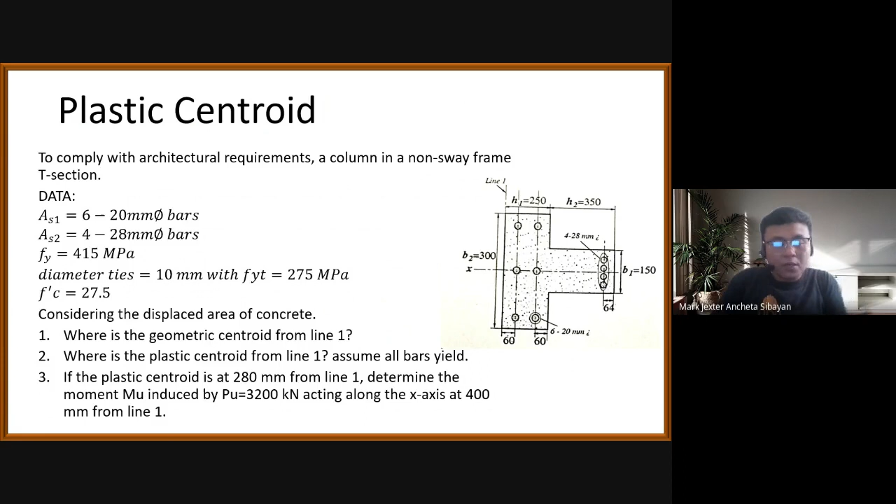Okay, considering the displaced concrete area. So sabi sa problem, i-consider na rin dito ating displaced area of concrete. So discuss naman natin yan sa ating discussion sa ating column.

So sabi dito, okay, where is the geometric centroid from line 1? Pinapana po dito sa ating question number 1 is kung saan po nakalocate yung geometric centroid from line 1. So this is our line 1. Hanapin daw natin dito yung ating geometric centroid.

Okay? Question number 2. Where is the plastic centroid from line 1? So same question lang sa ating number 1, yun nga lang, pinapana po dito is the plastic centroid. Take note of this, magkaiba si geometric at si plastic centroid.

And for our last question, if the plastic centroid is at 280 millimeters from line 1, determine the moment Mu induced by Pu natin na 3,200 kilonewton acting along the x-axis at 400 mm from line 1. Okay, so this will be our question number 3. Pinapana po dito yung ating moment.

Okay? So dito, try nating sagutan si question number 1. So for question number 1, sabi natin, okay, where is the geometric centroid located from line 1? So dito, this is our cross-section.

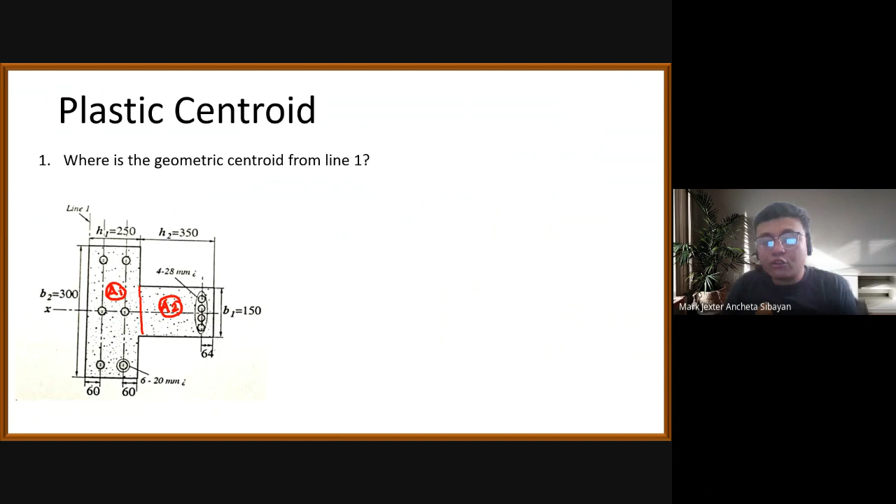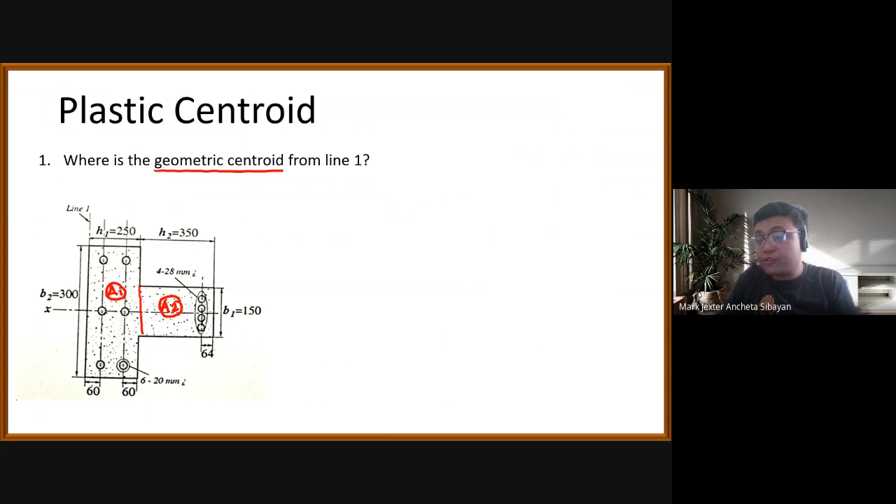So, punta tayo dito sa ating area 1. So, sabi natin, for the geometric centroid, tingnan guys ha, geometric centroid, hanapin natin yan. Para ma-solve natin yan, same lang doon sa gagawin natin sa plastic centroid. But this time, kapag geometric centroid kasi, Varignon's theorem using the moment of our area.

Okay? So, sabi natin, meron tayo dito, okay, from Varignon's theorem, area gross or the gross area multiply by x bar or yung ating x bar, yung location ng ating geometric centroid is equal to the summation of area times yung ating D, from line 1. So dito, hindi natin kailangan isolve yung ating AG times y bar equal to summation of AD.

Because kung titignan natin dito guys, okay, pagpalagay natin guys no, na this is our, yung ating reference for our y bar, kung mapapansin natin dito, naglalay lang naman sila sa isang lugar. So, ibig sabihin, no need na to solve for y bar. So, in this problem, si x bar lang ganapin natin.

Okay? So, dito, area gross is, ibig sabihin nito, yung ating gross cross-sectional area. Yung area ng buong cross-section natin. So, sabi natin, for area 1, meron tayo ditong 300 times 250. So, this is for our area 1. 300 times 250, meron tayo ditong 75,000.

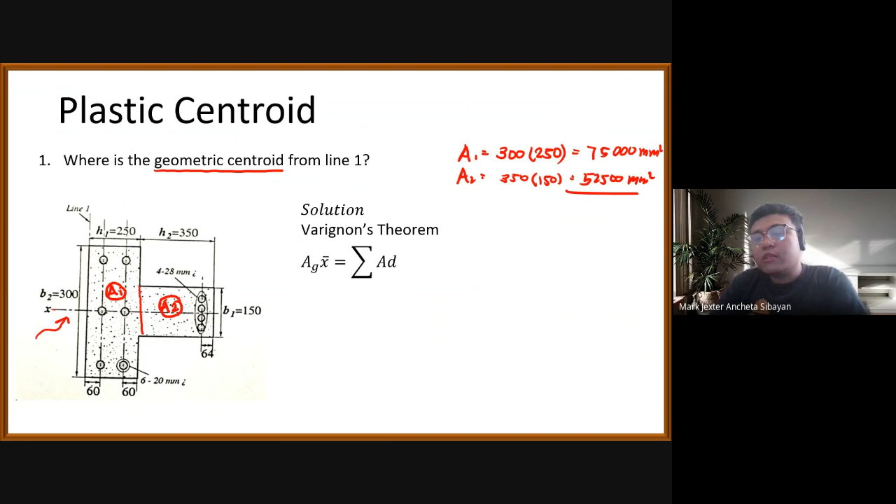Okay, square millimeter. Area 2 is ano? 350 times 150, diba? So, meron tayo ditong 52,500. So, 350 times 150, meron ditong 52,500 square millimeter. So, basically, pag-plus lang natin to, so meron tayo ditong ilan? Meron tayo itong 127,500. Tama ba? So, 127,500 okay, millimeters or square millimeters, this will be our gross area.

Okay? Tapos, i-multiply natin siya sa x bar natin. So, try natin i-solve. So, AG natin, which is equal to 127,500 times X bar is equal to our area 1 na 250 by 300.

Diba? Take note guys, our reference line is ito. So, ipagpalagay natin guys na this is our X sub 1 and this is our X sub 2. Yung location ng centroid ng bawat area papunta sa line 1 natin. Our X sub 1 is just the half of this 250. So, 250 over 2 is equal to 125. This is our X sub 1.

Okay? Times or plus yung ating area 2. Diba? This is our area 2 which is 350 by 150 times yung ating X sub 2. X sub 2 is the location of our area 2 from our line 1. So, meron itong 250 plus half of our 350, we have here 425.

So, dito, using our calculator, let's solve for X bar. Our X bar here will be equal to what? It will be equal to 248.529 millimeters. So, this is our conventional way of solving our X bar or the geometric centroid.

So, let's try naman guys, no, using our calculator. Okay, try lang natin, no, ipakita natin guys kung same lang mapapalabas natin dito na sagot. So, let me open my calculator here. Ayusin ko lang. Open natin si calculator.

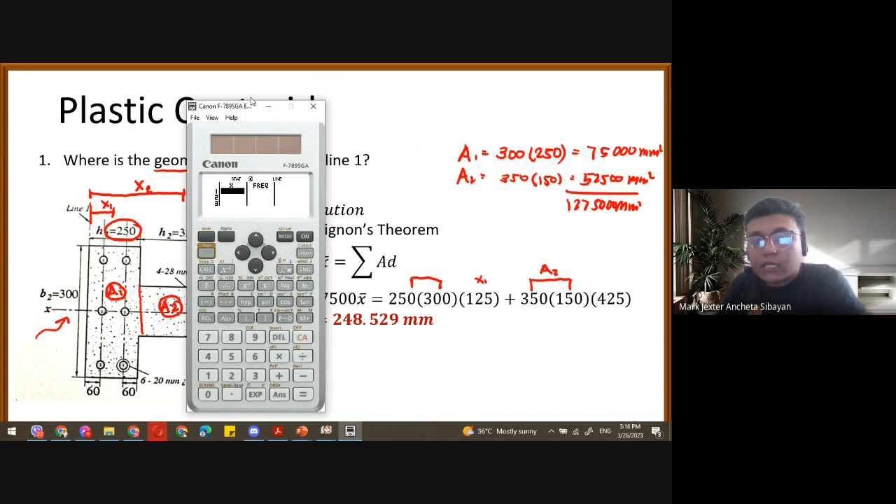Ito guys ha, labelan ko lang, no? Labelan lang natin, this is area 1, this is x sub 1, this is x sub 2. So try natin palabasin si calculator ulit.

X sub 1 natin is 125, tapos sa frequency natin is yung ating area, si 250 times 300, meron itong 75,000, o i-substitute nyo lang to. Punta tayo dito sa number 2 natin, x sub 2 natin is 425 equals, yung area 2 natin is 350 multiplied by 150, meron tayo ditong 52,500 which is same dito, o substitute nyo lang itong 52,500.

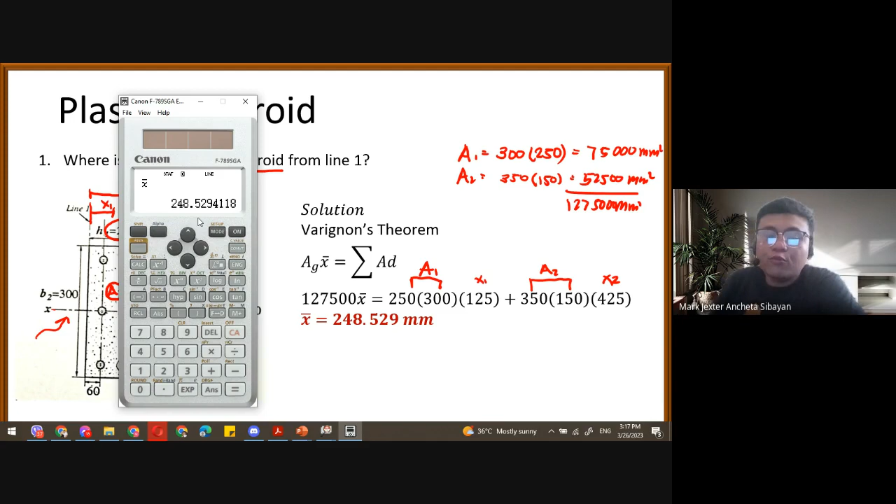Okay, so dito, after nating malagay ito sa ating calculator, pindutin nyo yung ating AC o yung CA. Punta naman tayo dito guys sa ating apps. Sa apps natin, gusto mong hanapin si X bar. To solve for X bar, punta ka dito sa ating variance, sa number 5 variance, meron itong 5, hanapin nyo lang dito X bar. X bar natin is number 2, so number 2 natin ito si 248.5294118 millimeters. Kung papasinin natin, same lang siya dito sa ating answer natin na X bar natin dito.

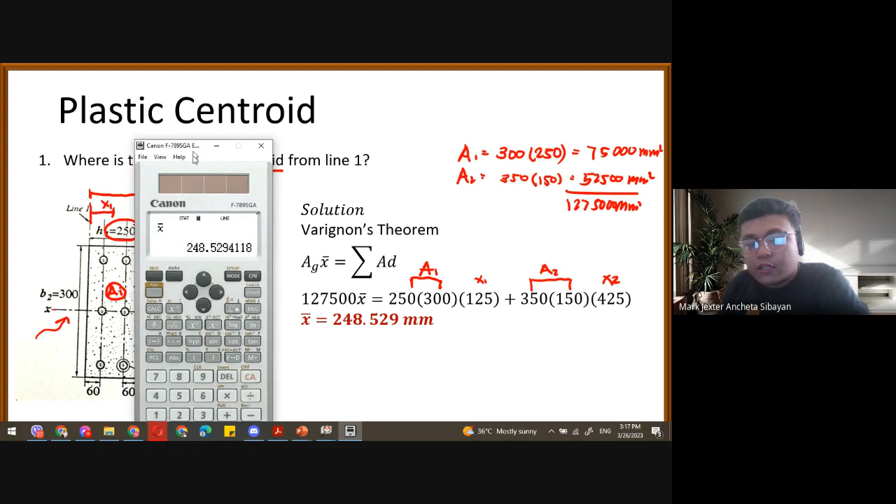So ito yung ating calculator technique in solving for our geometric centroid, using the stat function. So try natin guys, sa ating 991ES na calculator, kapag si 991ES naman yung calculator mo, buksan ko lang.

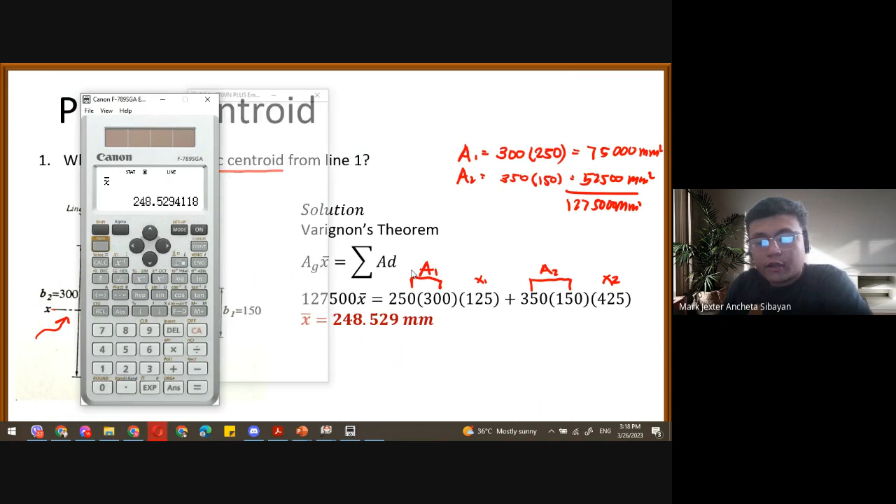Or si 570VN PLUS pala, okay gamitin natin siya. Ganun din, di ba? Punta kayo sa mode, punta kayo sa three, or dito sa stat function, tapos dito sa one variable, so 1, ganun lang din.

So para ma-open mo dito yung ating frequency, pwede mo si shift, si setup. Ibaba tayo, punta tayo sa number 4, on natin dito yung ating frequency. Same process lang, di ba? So meron itong 250 times 300. Yung ating x sub 1 na 125, tapos dito is yung area natin na 250, times 300.

So meron tayo ditong 425, yung x sub 2 natin times yung ating 350 multiplied by 150.

So AC nyo lang din to. Pero dito, wala tayo ditong apps na function, so pwede nyo itong shift, punta kayo dito sa 1 kasi dito yung ating stat function, so ito, punta tayo sa variance.

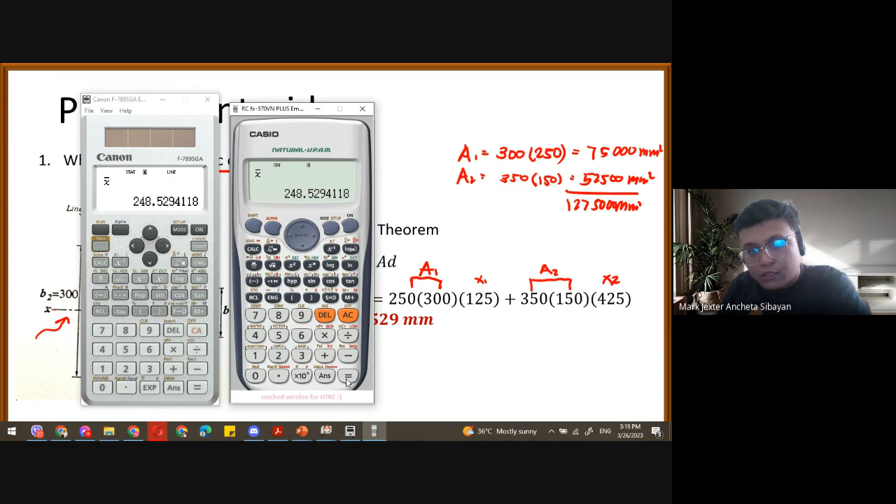Okay, number 4, hanapin nyo si X bar, si number 2. Papalabas nyo din dito si 248.529 mm. So same lang tayo dito sa calculator nito.

Para sa akin na mas okay gamitin sa akin si conventional way because mas mabilis ako mag-solve dito. Pero if ever man na you find this calculator technique useful, or sabihin natin convenient, okay, you may use this calculator technique in your exams, in your board exam or in your final exam sa pre-boards natin. Pwede nyo gamitin to, okay ba?

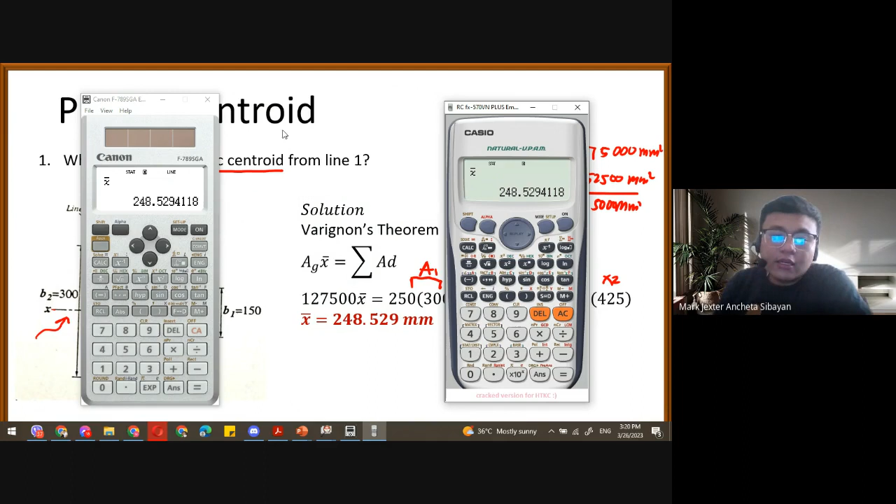Okay, so this is for our geometric centroid. Balik naman tayo guys sa ating question number 2. Ipakita ko lang yung question number 2 is...

Okay, pinapana po dito yung plastic centroid natin from our line 1. Same question lang, but this time is plastic centroid.

So for the plastic centroid guys, simple lang naman, i-moment lang natin yung mga forces natin papunta sa line 1. Ano ba yung mga forces na meron tayo dito? Basically, our forces here is si force A, force B, and force C.

Si force A natin is yung forces natin dito sa ating 1, 2, 3, 4, 5, 6 na bakal. Yung force B naman natin is dito sa ating 4 na bakal, 1, 2, 3, 4, this is our force B. At force C naman natin is yung ating concrete natin.

In other references, this is CS1, this is CS2, and this is CC. Pero dito, huwag natin pahirapan pa sarili natin, mag-ABC na lang tayo, para at least store na lang sa calculator natin. Try natin isolve yung ating forces natin sa ating steel tsaka sa ating concrete. Yung A at saka B is for steel, yung C natin is for concrete.

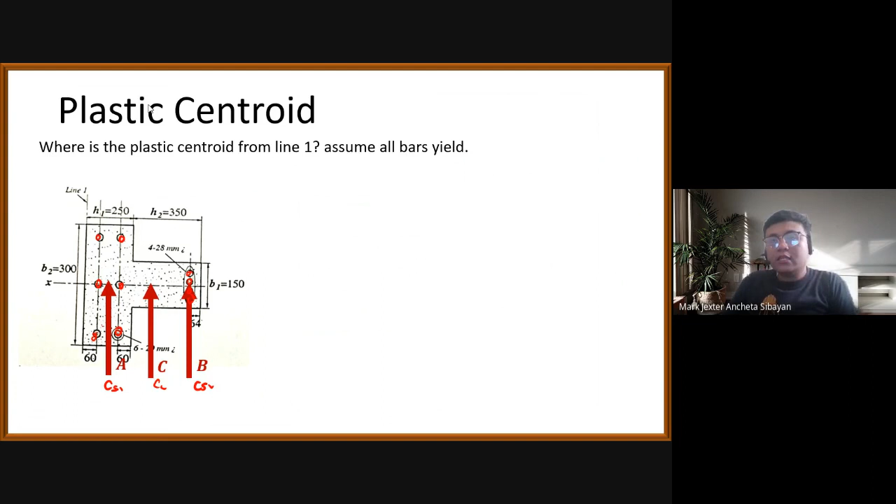Take note of this guys ha. Kung babalikan natin yung ating computation, ating forces sa ating singly reinforced beam, diba sabi natin, yung ating force is AS Fy, tama ba? Ganon din dito, but this time, meron tayo ditong kinoconsider na displaced concrete area.

So in our problem, if balikan natin yung problem natin, nakalagay dun sa problem natin na we will be considering, pakita ko lang, the displaced area of our concrete. If sinabi to sa problem natin, we will deduct this displaced area of concrete doon sa ating AS natin. Okay, pakita lang natin guys ha.

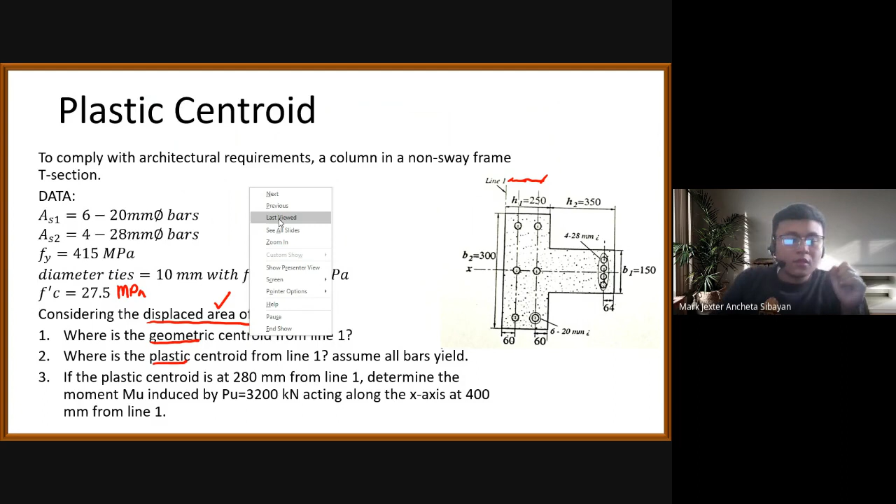Pakita natin. So for our force A, meron tayo ditong AS times Fy minus 0.85 F prime C. Di ba usually ang ginagawa natin is AS Fy. But this time kasi guys, we will be considering the displaced concrete area. So in considering our displaced concrete area, guys, sabi natin is ima-minus natin to. Pero kapag inineglect natin yung ating displaced concrete area, wala tong values na to.

So try natin isolve yung ating question number A, erasing ko lang to. AS natin, guys, sabi natin is meron tayo ditong pi over 4 times 20 squared times 6 na bakal yan, multiplied by Fy natin na 415 minus 0.85 times 27.5. Using our calculator, mapapalabas itong value na to.

So store nyo na lang to sa A natin, please store this at A. Okay, try natin gamitan ng calculator, store ko na lang sa A. Meron tayo ditong, ayusin ko lang, i-clear ko lang muna lahat.

Okay, so meron itong pi over 4 times 20 squared times 6 times 415 minus 0.85 F prime C natin na 27.5. Okay, so basically yan lang din mapapalabas natin, di ba? So store na lang natin to guys sa ating A. Store at A, okay, para at least mamaya is kakalculate lang natin yan.

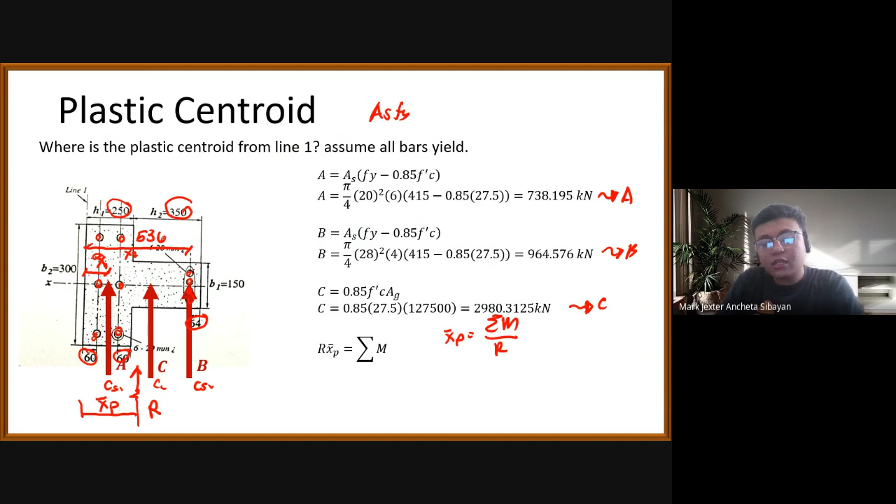And x sub 3 naman natin is itong concrete natin. Basically, x sub 3 is equal to our x bar, di ba? Because same lang naman yung reference point natin sa ating geometric tsaka sa ating plastic centroid. So x bar natin yung ating x sub 3 natin. So meron tayo dito 125 times A, okay, plus 536 times B, plus 248.529 yung ating x bar kanina times C all over A plus B plus C. X bar P natin will be equal to 288.268.

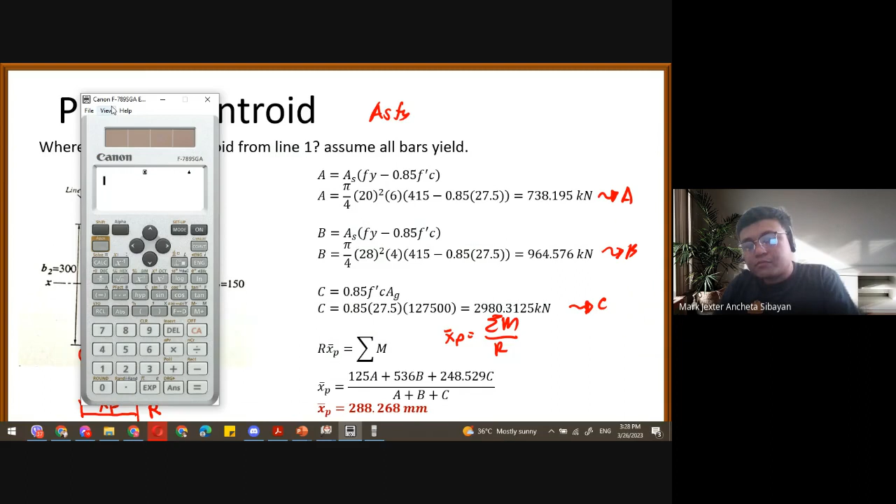Okay, confirm natin guys na kung tama ba yung sagot natin. So dito calculate natin yan. Okay, so meron tayo ditong 125 okay, times alpha A, okay, plus 536 alpha B plus 248.529 alpha C.

Okay, alpha C. Okay, so dito, A plus B plus C. Plus C. So natin dito, mapapalabas nyo dito, sino? Wait lang, ayusin natin siya. Okay, kulang ako dito ng 248 pala to.

So dito guys, meron din tayo ditong calculator technique using the stat function. Basically, yung stat function natin kanina na ginamit, yun lang din gagamitin natin dito. But this time, ang ating ibabarignons dito is yung ating mga forces. Okay, so try natin guys gamitin itong ating mga to using Varignon's theorem. Di ba?

Using yung ating calculator. Okay? So, same process lang. So, mode tayo. Punta tayo sa ating 3. Dito tayo sa ating single variable.

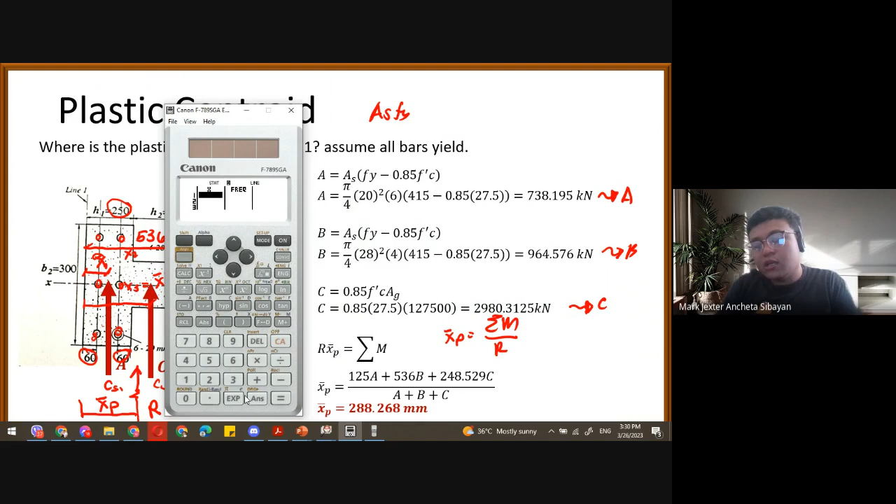So 1. Okay, open natin yung ating frequency. Shift mode, para mapalabas yung setup. Dito, baba, punta tayo sa start. Open natin siya, o on natin yung frequency. Okay, dito sa x is yung mga x distances natin.

X sub 1 natin, guys, is 125. Yung frequency natin dito is yung ating force A, which is si 738.195, di ba, nasolve na naman natin kanina yung A natin? So alpha A ko na lang dito. Okay, so ito po yung ating frequency natin.

Punta tayo sa ating x sub 2. X sub 2 is 536. Tapos yung ating area 2 naman natin, o yung ating force B naman natin, yung letter B, is 964.576, o alpha B, di ba? Next naman is itong 248.529. Okay? And then meron tayo itong force C natin, so alpha C. Yan po yung meron tayo.

Okay, so kompleto na po yung meron tayo. Tama po ba? Okay, so sa ating A, B, and C natin, so AC lang natin to. Punta tayo dito sa apps. Punta tayo dito sa ating variable. Okay, dito sa variance, sa variance natin sa number 5.

Hanapin natin si X bar dito. So X bar is 1. Papalabas nyo dito, hindi ko napindot. Okay, 1, 2 pala, this is 2. So meron tayo ditong 288.268 millimeter. So kung papansin natin dito, same lang mapapalabas natin dito, no?

Using our calculator technique. Okay? So you may use this calculator or this conventional way. Okay, dito guys, no, hindi na ako nahirapan since sinubstitute ko na lang siya sa A, B, at saka sa C. Okay, yung ating mga forces natin. Okay, so back ko lang dito.

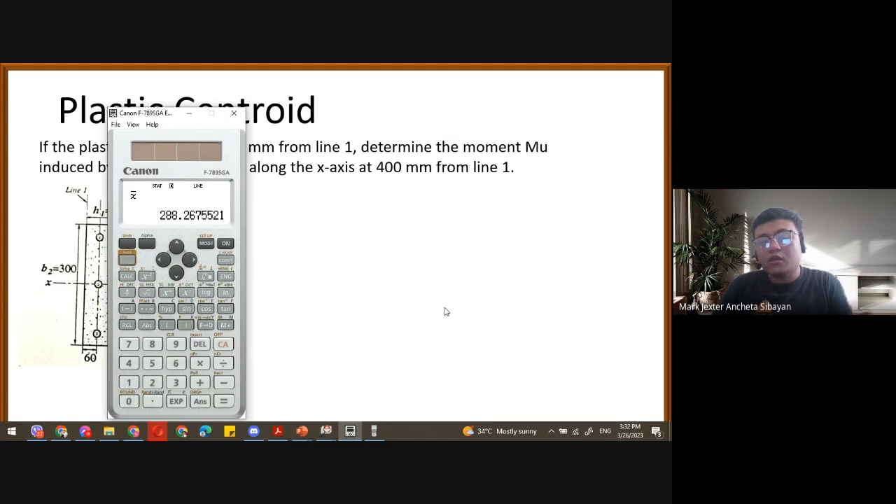So try naman natin guys dito sa ating calculator na isa. Okay, so para sa calculator na isa natin, lagay ko na lang to, no? So 7, 3, 8, okay, mamaya na lang. So mode 3, 1 ulit. Okay, so ganun lang, so x natin is yung x distance, so 1, 2, 5.

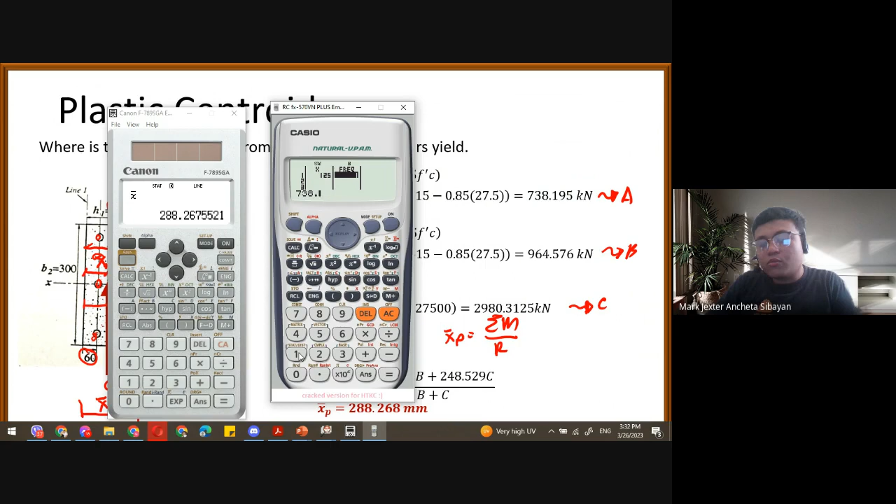So A natin, force A is 7, 3, 8, no? Dito, itatype ko na lang since di ko naman napindot, 195. Okay, x sub 2 is 536. Force B natin dito is 964.576.

Okay, sa ating 3 naman o sa ating force C is yung ating distance niya na 248.529. And then, yung ating force C natin is equal to saan? 2980.3125. Okay, AC natin to.

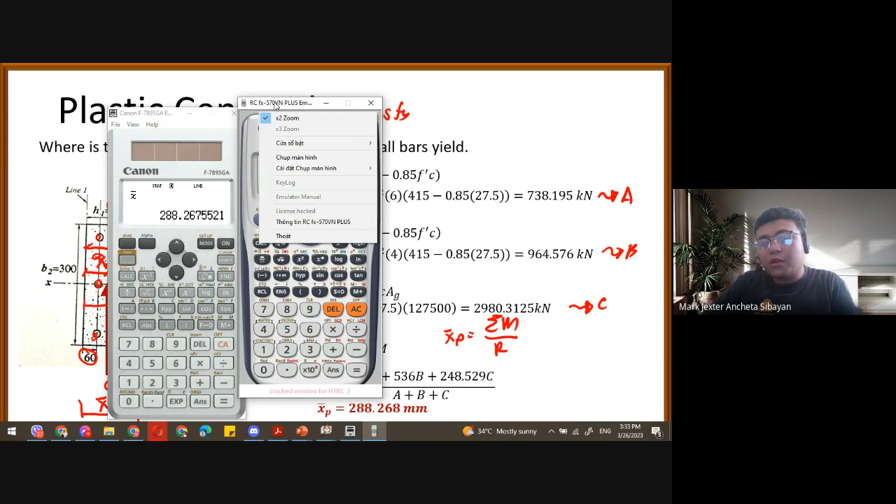So shift, ito, punta tayo sa variance, so number 4. Punta tayo sa ating X bar, so number 2. So equals lang natin to. Mapapalabas nyo si 288. Okay. Medyo maiba dito, 265 o 268 lang din pala. Pares lang din pala yung mapapalabas natin. Okay, so you may use your calculator or you may use the conventional way of solving our problem. Okay?

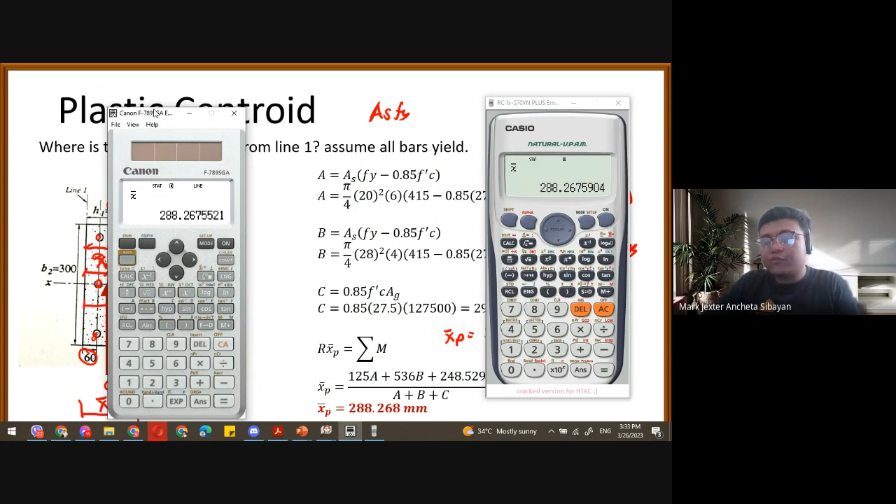So try naman natin guys, no, ito ating last question. So dito, nag-calculator technique tayo. Last question natin, balik tayo dito. Okay, meron tayo ditong: if the plastic centroid is at 280 millimeters from line 1, determine the moment mu by pu 3,200 kN acting along the x-axis at 400 mm from line 1.

So interpret natin to, no? Yung ating plastic centroid daw is located, okay, so pakita ko na lang to. Wait lang, okay, irisin ko na lang to guys, ha, para hindi tayo mahirapan. Tanggalin ko na lang itong mga forces dito.

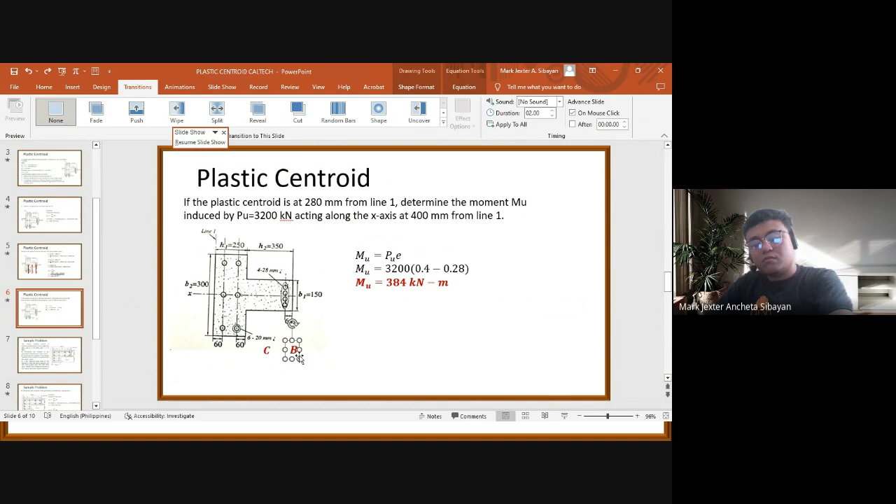Okay, balik tayo dito. Okay, so sabi natin guys, no, ilisin ko lang to. Okay, sa problem natin na to, meron tayo ditong centroid na pinapahan, o given na plastic centroid which is 280 from line 1. So ipagpalagay natin guys na this is our x bar P na 280. This is our x bar P, 280 millimeters from line 1. So x bar P natin yan.

So dito sa problem natin, pinapala po dito yung ating moment na kung saan meron natin itong acting load na 3,200 along the x-axis, along dito, which is 400 millimeters along o from line 1. So 400 natin, ipagpagyan guys, no, ito, yung 400 natin, location na ating force natin. Andito yung force natin na 3,200 kilonewton. Okay, so sa problem na ito guys, so tandaan natin guys, no, meron tayo itong formula kasi ng moment natin.

Moment is equal to force times eccentricity, or mu is equal to pu times eccentricity. And guys, dito sa ano natin, eccentricity, it is measured from our plastic centroid up to the point of our load. Okay, so ito yung ating eccentricity na hinahanap.

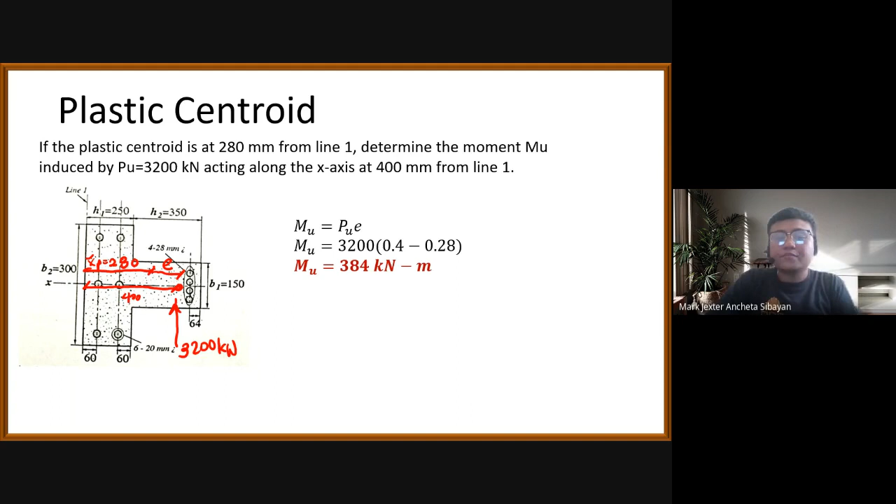Yung mula dito sa ating plastic centroid, hindi po sa ating geometric centroid. So mu natin basically is equal to 3,200 times 0.4 minus 0.28. Okay? So meron tayo ditong ilan? Mu natin dito will be equal to 384 kilonewton meter. Okay? So ito, yung ating unang problem dito sa ating plastic centroid.

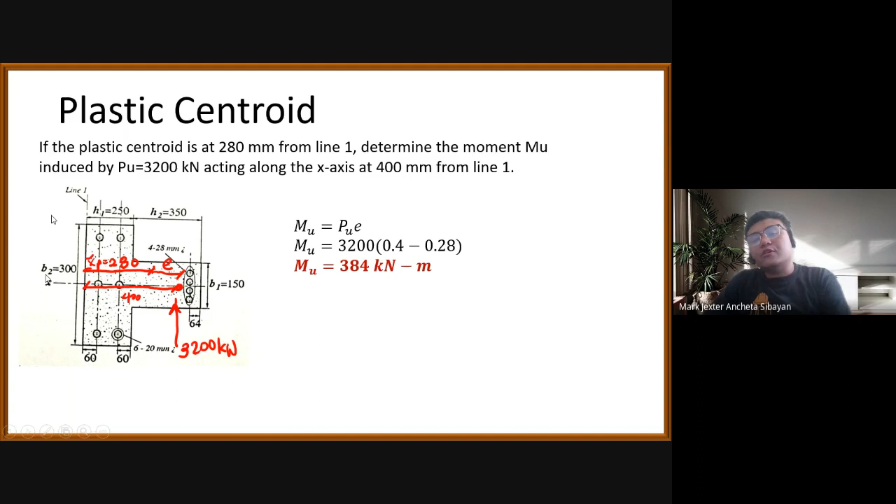Dito sa problem natin, nag-solve tayo guys using the conventional way and then the calculator technique. So in your board exam or in your final examination, you may use this calculator technique or you may use the conventional way, kung ano ba yung mas convenient sa atin. If ever man you want to use both, okay lang para ma-verify nyo kung tama ba yung sagot natin.

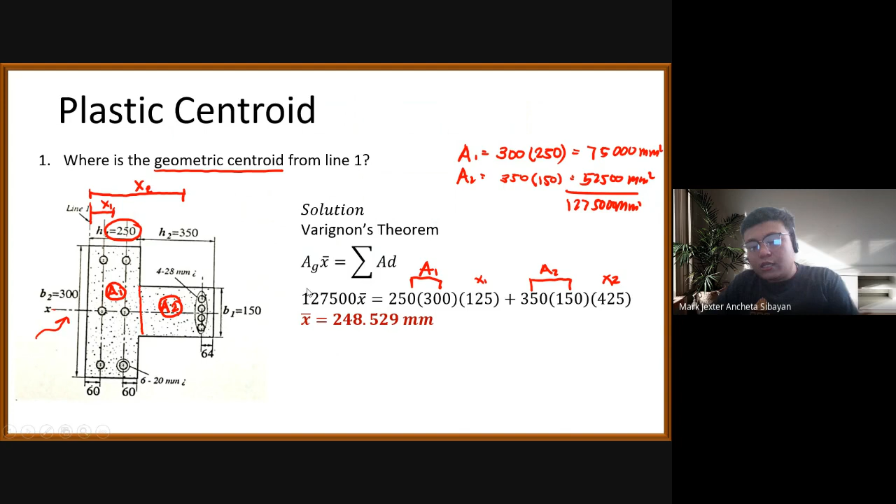Siguro dito, baka sabihin natin na niloloko ko lang kayo since isang problem lang to. So try natin guys magkaroon ng isa pang sample problem, para ma-verify natin if tama nga ba yung ating sinosolve. Dito guys, ipakita ko lang, di ba kanina, para mas makita nyo dito sa problem na to, ang ginamit ko sa calculator natin, o balik ako dito sa ating slide number 2.

Ang ginamit ko dito is yung ating mode 3.1, which is yung ating single variable. Pero pwede nyo gamitin dito yung ating linear. Kapag ginamit itong linear natin, dalawa yan, si x and y. Pwede mo gamitin to, pero ilalagay mo lang sa y since wala ka naman ditong y distance, ilalagay mo ditong 1, 2, 5. Okay, may itong 0 sa ating y.

Frequency natin dito is ito, si A natin. Okay, ganoon lang din. So number 2 natin is 536, diba? Okay, 0 lang din yung y natin. So B tayo, force B. Okay, ganoon din dito. 248.529, tapos 0, tapos ating ano dito is 4C, diba?

Okay, you may use this, actually dito sa calculator technique na to, mas ginagamit ko si mode 3.2, yung ating linear na stat function. Because what if kapag meron na tayo ditong y distances, tama ba? Pero dito sa problem na to, wala tayong y distance dito, kaya 0 yung nilagay ko. Okay, so try natin i-solve to.

So AC natin, check natin, i-verify natin guys. Meron tayo itong apps natin. Punta tayo dito sa ating variance, punta tayo dito sa ating x bar. So x bar is same lang, di ba? Lalabas natin ito si 288.

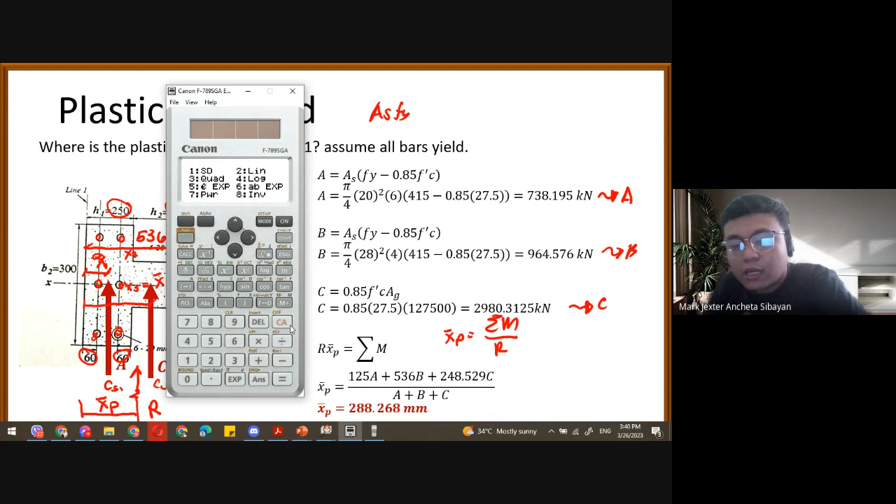If ever man we want to solve for y bar, check natin. Y bar natin is itong 5. Okay, 0 lang din, di ba? Because wala nga tayo ditong y distance, di ba? Pero makapaka-convenient nitong ating y bar at x bar natin, itong ating mode 3.2, itong linear natin, kapag yung ating section ay meron na po tayo ditong y distance, di ba?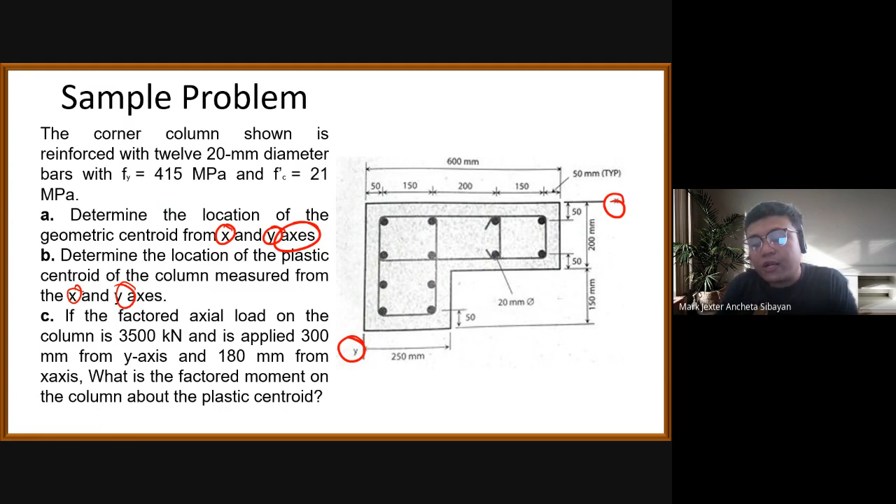Okay, ito yung ating x, ito yung ating y axis. Question number 2, or letter B, is yung ating plastic centroid measured from X and Y axis, same question pero plastic centroid. And for letter C naman, hanapin naman po natin dito yung ating factored moment natin about our plastic centroid. So in this problem, walang sinabi guys na consider the displaced area of concrete. If not said in the problem, gamitin nyo na lang guys yung neglect the displaced concrete area. I-neglect na lang natin guys kapag hindi sinabi sa problem kung i-consider or kung i-neglect.

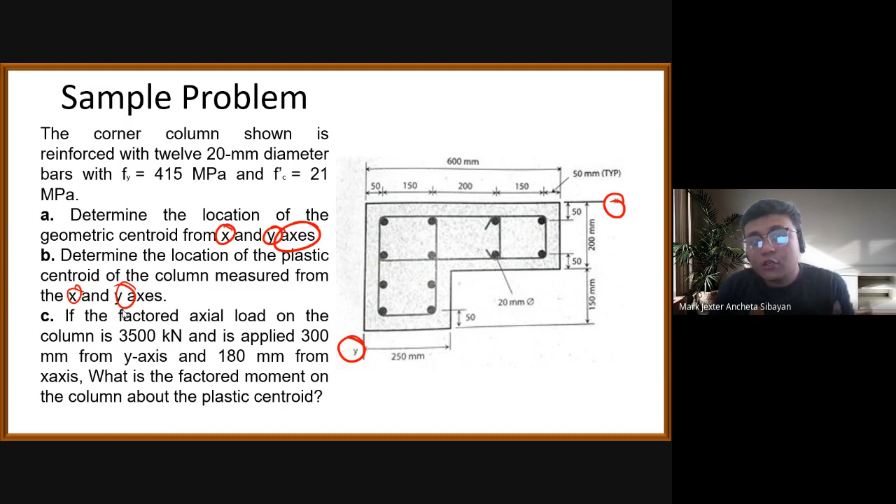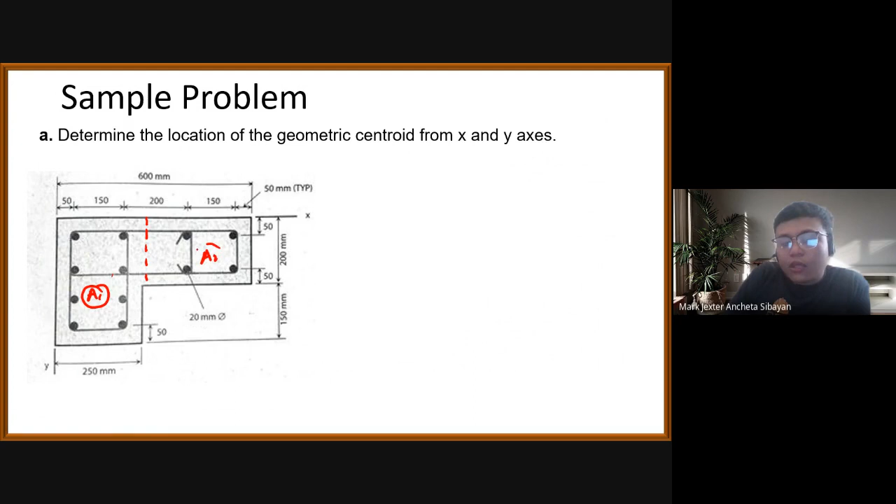So kapag if not given, i-neglect nyo na lang yung ating displaced concrete area. Okay, so try natin guys sagutan itong ating question number 1 o letter A. So for letter A natin, solve natin si geometric centroid. If sinabi natin geometric centroid, solve for the centroid ng area. So hatiin na lang natin to guys. Ito yung area natin, so this is our area 1 and this is our area 2. Di ba? So sabi natin guys, our solution here is for Varignon's theorem, A sub G times x bar is equal to the summation of A times d.

A1 natin dito, isulat ko lang dito na para medyo mabilis. A1 natin dito is 250 multiplied by, ilan ba itong height natin? 200 plus 150 is equal to 350. So using our calculator, 250 times 350 is equal to 87,500 millimeters squared. A sub 2 naman natin is ilan? Okay, meron itong, ilan ba to?

Okay, meron itong 600 minus 250, it is equal to 350, right? So 350 multiplied by 200. So 350 times 200, meron itong 70,000 or 70,000 mm squared. So, ipag-plus natin to, 70,000 plus 87,500, it is equal to

157,500. So, 157,500, ito AG natin. So, AG is equal to 157,500 times X bar equal to 250 times 350. Okay, unahin mo natin sa X bar natin.

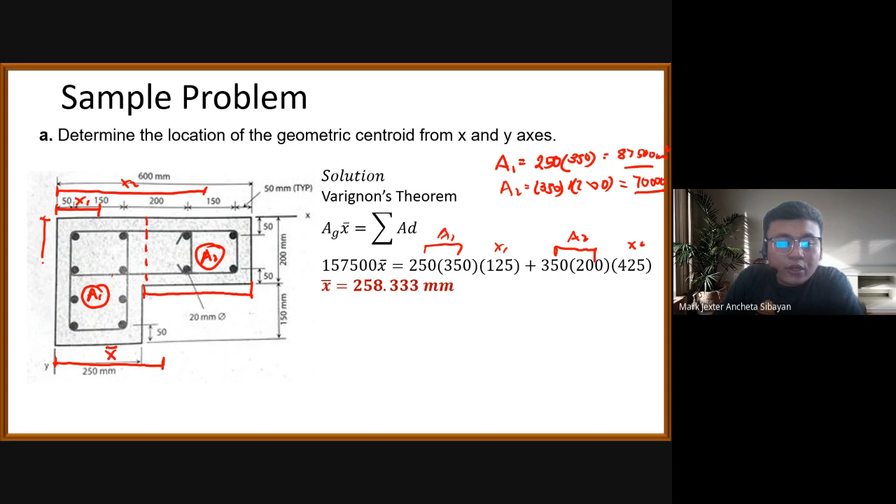Punta naman tayo guys dito sa ating Y bar natin. Same concept lang, di ba? But this time, okay, ito yung Y sub 1 natin. Kasi ito yung ating X axis, di ba? Ito naman yung Y sub 2 natin. Ang pinapanap dito guys is si Y bar.

Okay? So, 157,500 times Y bar is equal to area 1 times Y sub 1, 175, which is half of our 350, times or plus area 2 times half na ating 200, which is 100. Okay? So, yung ating Y bar natin dito using our calculator is equal to 141.667.

Okay? So, what if naman kapag gamitan ito ng calculator technique? So, using the calculator technique, ipakita natin. Okay, in calculator technique, ayusin ko na lang. Okay, iba ko lang to. Calculator technique natin, irisin ko lang to. Okay? So, wait lang, nawala to.

So, mode 3. Kapag gagamitin mo si 1, medyo mahaba because isa para dito sa ating X, isa para sa Y. Kaya kapag ganito, dalawa na yung hinahanap mong variable, okay? Pindutin mo lang si linear kasi dito sa linear, may dalawa kang variable dito. Diba? Yung ating X tsaka yung Y natin. So, 2 tayo. So, X is yung ating X sub 1. y is yung ating y sub 1.

So, 1, 2, 5. Ito yan, no? Yan yan. Tapos, sa y natin, ilagay nyo to, 175. Diba? Okay nga pala, wala pala tayo ditong frequency. So, solve natin buksan natin si frequency. Open ko lang, nakalimutan ko, sorry. Okay, so ulitin ko. 125. This is 175.

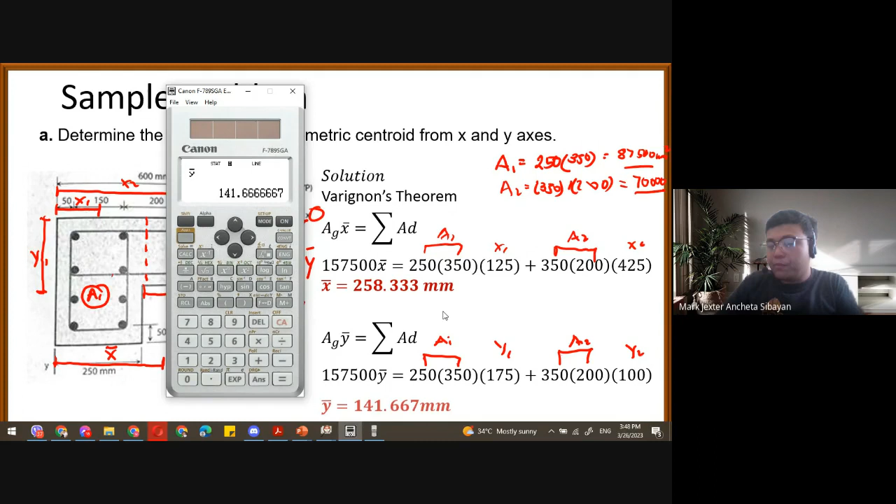Okay, for question letter B, the plastic centroid. Same procedure, di ba? Let's place force A, force B, and force C. A is for the bakal here, B is for this one, and C is this one. These variables I placed in the middle kasi pare-parehas sila, same bakal. Pero kapag magkaibang bakal yan, iba yung force mo dito, iba dito. Nasusundan? Okay?

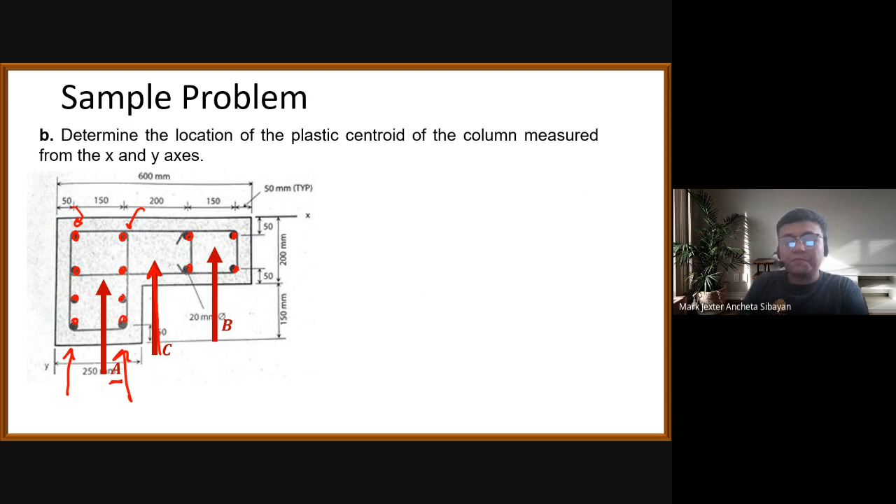So let's go to force A. Take note guys, walang sinabi sa problem na i-consider si displaced concrete area, so wala na itong minus 0.85 F prime, 0 na po yan. So meron tayo itong ASFY, which is pi over 4 times 20 squared times 8 times 415, equal to 1043.009 kilonewton.

Pero i-calculator ko na lang yan guys para ma-store ko siya. Pi over 4, i-clear ko muna. Pi over 4 times 20 squared times 8 times 415. Okay, so meron itong 1,043.009 or 1,043,008.761 Newton. Store natin to sa A.

Next naman is sa B. Same procedure, pero dito neglect pa rin itong displaced concrete area. So pi over 4 times 20 squared times 4 times 415. Meron tayo itong 521,504, same lang, di ba? Store natin yan sa B.

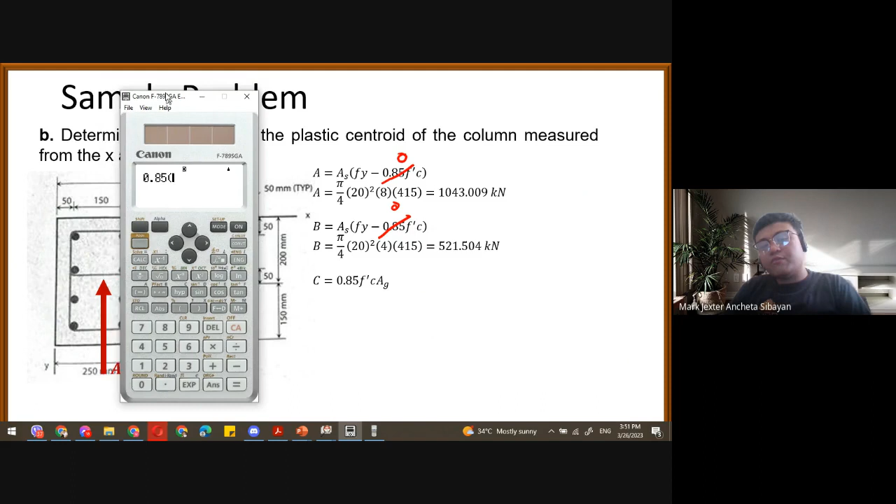Ay sorry, error. Store natin yan sa B. Okay, next naman is last, yung ating concrete. C is equal to 0.85 F prime C AG. Meron tayo itong 0.85 F prime C, which is 21, times 157,500. So 2,811,375 Newton or 2,811.375 kilonewton. Store natin to sa C.

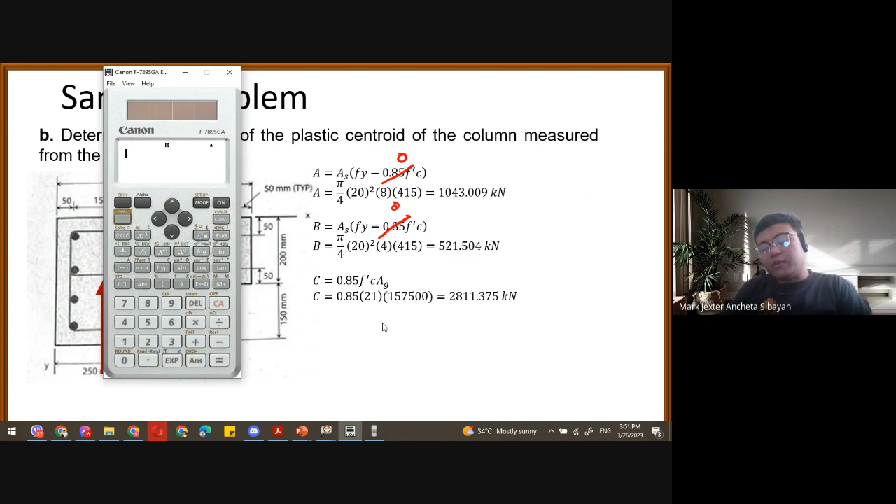Okay, same procedure lang, di ba? So meron itong R natin or X bar natin. The distance X natin dito is ito hanggang dito, ito hanggang dito, ito hanggang dito. X sub 1 natin is equal to half lang ng 250 because nandito sa gitna itong bakal natin, so meron itong 125.

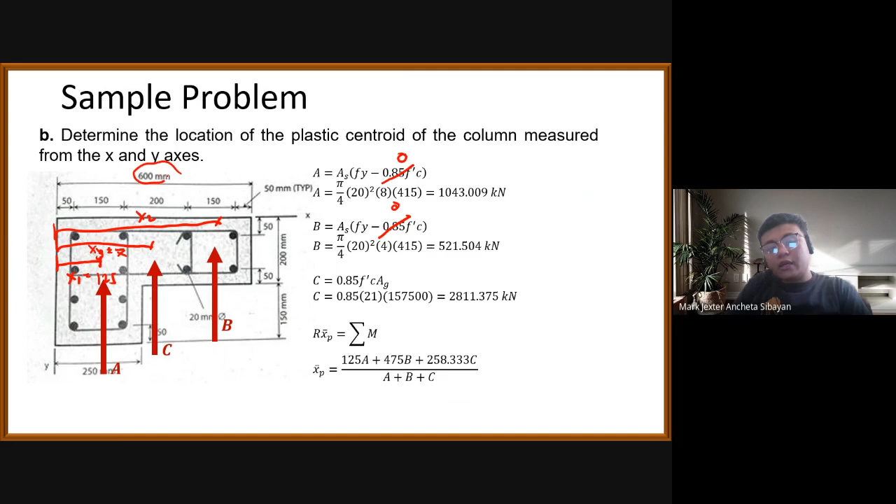X sub 2 naman natin guys, or X sub 3, is equal yan sa ating X bar natin. And X sub 2 naman natin guys is yung ating 475, which is 600 minus 50 minus 150 over 2, di ba? Papalabas nyo dyan is si 475.

Tama po ba? So this is equal to 475. Plus yung X bar natin na 258.333 times C, all over A plus B plus C. Using our calculator, mapapalabas natin dito, X bar P natin is equal to 252.374 millimeters. Check natin sa calculator: 125A plus 475B plus 258.333C all over A plus B plus C. Okay, 252.374, 2788, di ba?

Okay, punta naman tayo sa ating Y bar P natin. Ipakita ko na lang to, this is our X bar. Y bar P naman is mula dito hanggang dito, ito yung mga Y natin. Meron tayo dito guys, same lang, di ba? Y bar P is equal to 175. 175 yung A natin because half lang nitong 350. Yung ating 100 is half lang itong 200 natin because same lang to, so this is 100.

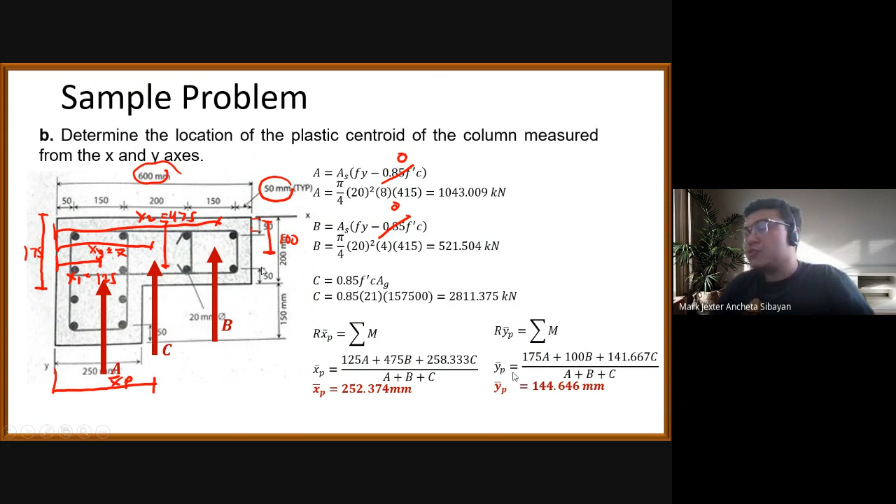Okay, try natin guys by using calculator technique. Simple lang, di ba? Gamitin nyo lang ginawa kanina. Mode 3.2 ulit, open natin yung ating frequency. Shift mode, frequency is yung start natin, on natin yan, ganun lang. Yung X is yung X distances, yung frequency is yung ating mga forces.

So meron itong 125, ito yan. Tapos 175, ito yan. Frequency is yung ating force natin. Okay, next naman is 475, ito po yan. Tapos 100.

Meron tayo itong yung B natin. Tapos, dito tayo sa C natin. 258.333. Tapos, 141.667. Ay, sorry. 141.

Frequency natin dito is yung ating force C, diba? Okay. So, kompleto na tayo. Meron itong ating force A, force B, at saka force C natin.

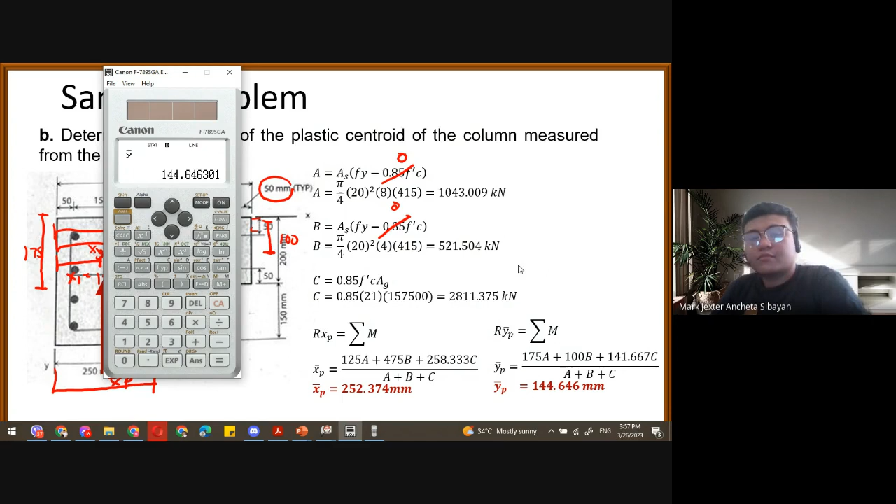Okay, let's go sa ating last question. For our last question, guys, pakita ko lang. Last question, okay, ito yung ating X bar P, Y bar P natin. Pinapanap po dito yung ating factored moment of our column.

So basically, given dito sa problem natin is yung ating location ng ating load natin, which is applied 300 mm from y-axis. So from y-axis, mag-measure ka ng 300 mm dito. Tapos 180 mm from the x-axis. So 180. Pagpalagay natin guys na ito yung point na yan na pinapahanap. Nandito yung force natin. Okay?

So in this problem guys, basically we will be having two moments. Moment mo dito sa x, si MUX. Moment mo dito along y, si MUY. Okay, so paano mo malalaman kung ano ba yung ating gagamitin dito na eccentricity? Depende kung anong klaseng hanap, di ba?

Ayusin ko na lang. Okay, or sorry, hindi pala dito yung ating arrow. Ipakita ko na lang. Yung plastic centroid natin, i-plot natin yan. So, plastic centroid, X bar P is 252. Okay, 252, it is somewhere here. Ayusin ko na lang. From here up to here, this is 252.374. Tapos dito, hanggang dito, this is 144.646. So ito, basically ito yung ating plastic centroid.

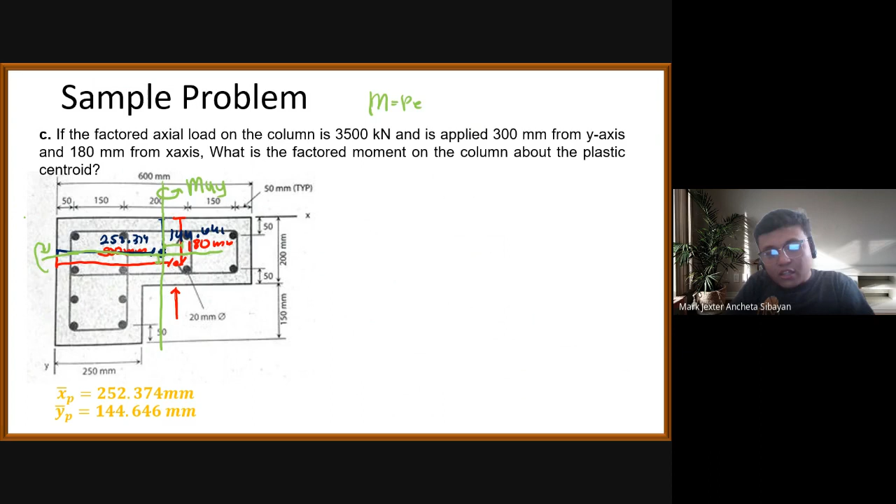Ito yung ating MUY. Ito yung ating MUX. Okay? Solve natin yan. So, MUX natin is equal to PU times EY, which is true. Tama ba? Kasi kung titignan natin, guys, sa MUX natin, ito yan, no? Yung eccentricity na magamit mo is ito, di ba? EY. Tama ba? So, EY nga i-multiply natin.

So, MUX natin is equal to saan? Simple lang, di ba? Meron tayo itong 3,500 na given na PU times yung ating distance natin from our x-axis, which is 180, di ba? 180, given yan sa problem, i-minus natin yan sa ating y bar P natin, di ba? Which is 144.646, di ba? Kapag EY, i-multiply mo na lang to dun sa distance y natin, it equal to saan? Sa distance y minus y bar P, di ba? So ito yung ating EY natin. So MUX is equal to 123.739 kilonewton meter.

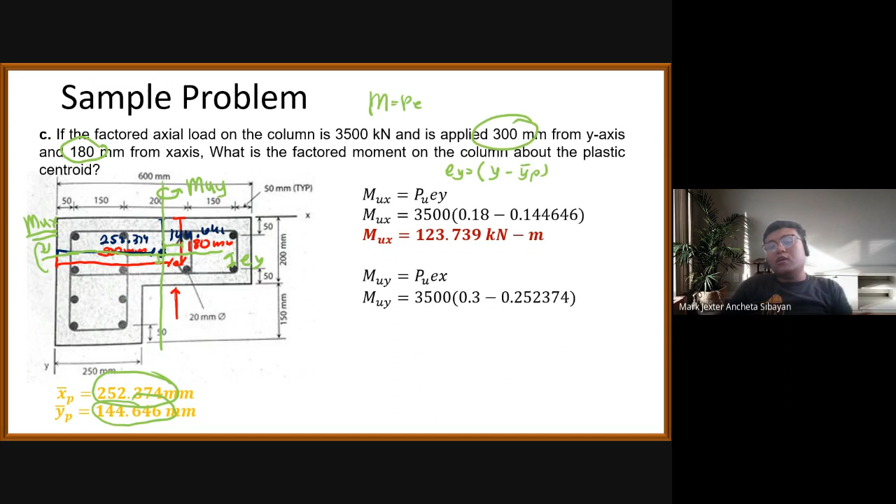Okay, next naman is si MUY. MUY is PU times EX. So meron tayo itong PU natin 3500 times yung ating distance X natin, which is measured from y-axis, which is ito, 300 or 0.3 minus X bar P. X bar P is equal to 252.374. Okay? So MUY natin dito will be equal to 166.691 kilonewton meter. Okay, so this will be our moments.

So take note of this guys ha. Moments natin is nakadepende kung ano nga ba yung eccentricity natin? Sa ating MUX, gamitin mo si eccentricity Y. Sa MUY, gamitin mo si eccentricity X. Okay, take note guys ha. Ang gamitin mo dito, palagi na reference is yung ating plastic centroid. Ito palagi. In the board exam, sa multiple choice question, okay, pwedeng mapalabas doon sa moment is kapag ginamit mo yung ating geometric centroid, magkakamali ka na agad kapag yun yung shinidan mo. Okay? So mag-ingat tayo palagi sa isi-shade natin na tamang sagot. Okay? Make sure natin guys na gamitin natin palagi yung formula natin or yung ating principle natin dito sa ating plastic centroid. That our eccentricity is always measured from the plastic centroid. Okay?

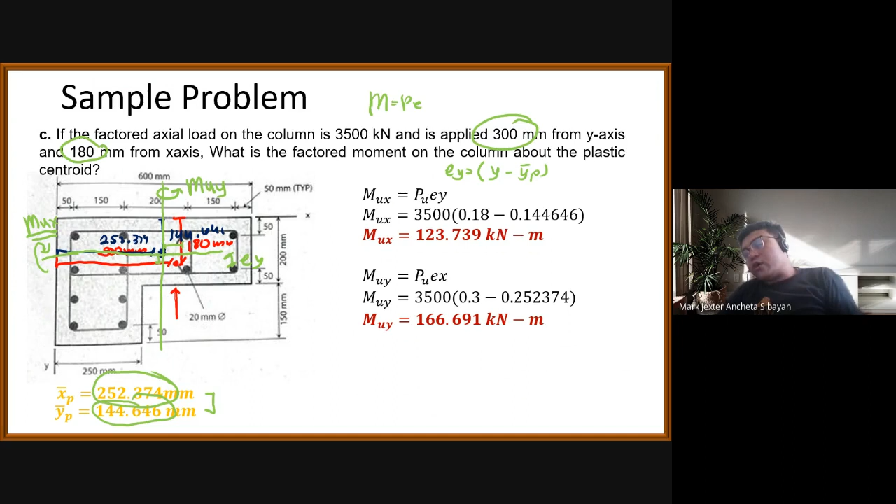Okay. So basically, this will be our sample problem dito sa ating plastic centroid.